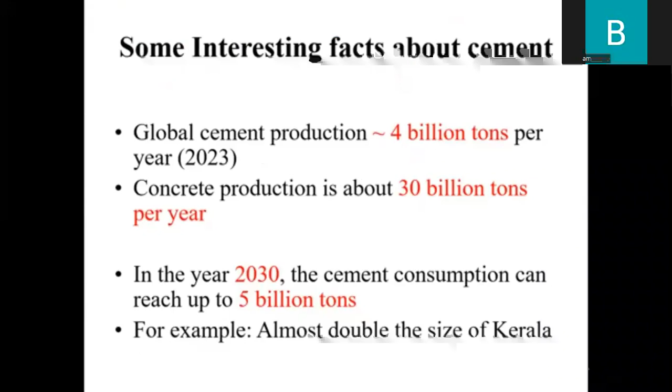So before we move to the session, I would like to discuss some interesting facts about cement and concrete. It is estimated that in the year 2023, 4 billion tons of cement was produced. And another important thing is 30 billion tons of concrete was produced out of 4 billion tons of cement.

And in the year 2030, the global cement production may reach up to 5 billion tons. This quantity is more than enough to cover the entire Kerala state with 1 inch thick cement. So that much amount of cement is being produced and is being utilized throughout the world.

And coming to the next, why is concrete the most commonly used building material and why not others? Actually, based on my perspective as well as from the recent studies led by Professor Gettu and Professor Manu Santhanam from IIT Madras, there are 5 aspects: versatile, durable, constructible, available as well as economical. These are the 5 major aspects in which cement concrete plays a major role.

Versatile in the sense, the adaptability. Concrete is also called liquid stone, which acts as a liquid or plastic mixture when it is wet. In the liquid state, it can be poured and molded into any shapes or any sizes or any forms. And once it sets, it acts as a stone. That is why it is called liquid stone. This allows for the freedom of construction and reduces the structural complexity.

Its properties can be altered by adjusting the mix. For example, if we alter the water cement ratio, aggregate proportion, and the proportions of admixtures, say for example, plasticizer or retarder or air entraining admixtures, the physical, mechanical as well as the durability properties of the concrete will be varied. That is one of the greatest advantages of using this. And as I said previously, it can be molded into different shapes. Its application is widespread in all the civil applications.

And the second important aspect is durable. Concrete shows good durability characteristics under aggressive conditions such as marine environments, whereas steel and other materials will not do the same because of the possibility of corrosion and other related issues in the marine environment. Also, concrete has some disadvantages in offshore application, but when compared to all other construction materials, the longevity of concrete under such conditions is quite high. And if properly designed, concrete structures may last for centuries.

Say for example, we are now in the 2nd generation concrete, which Joseph Aspdin formulated in the year 1824, 200 years ago in England. The same concrete is still used now, but in some countries, people are replacing some proportion of cement with supplementary cementitious materials. It's called sustainable concrete. And this type of concrete we call 3rd generation concrete. We are slowly moving from 2nd generation to 3rd generation concrete.

And the last aspect is economical. Once the building is constructed with the help of concrete, it can stand for years, where low maintenance is required when compared to all other construction materials. So if you provide very low maintenance, it can last for centuries. If you take any steel or bamboo based structures, they may tend to fail or degrade under different environmental conditions. This type of failure or degradation cannot be seen in concrete based structures.

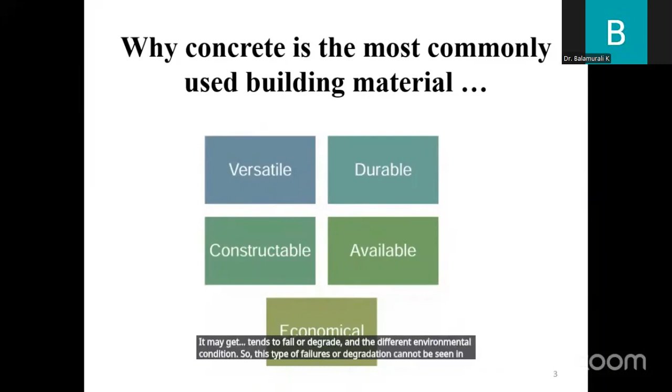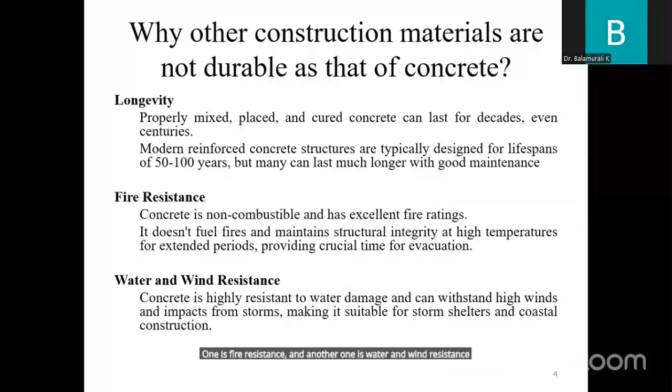Apart from these 5 reasons, we have a few more things. One is fire resistance and another one is water and wind resistance, whereas steel and other materials will not behave as concrete does.

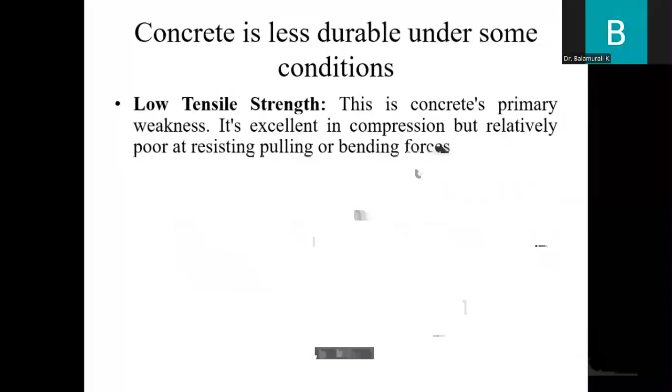And coming to next, concrete might be less durable under some conditions. Generally, concrete is a brittle material. It will not take any tensile loads. Because of it, we use steel as a reinforcing element to take care of the tensile loads. But in addition to that, some drawbacks are there in concrete also. Say for example, cracking. Different types of cracks will be there. Say for example, shrinkage cracks.

During the setting time, it may happen, and loading cracks due to the application of heavy loads, and durability cracks. It may appear due to different environmental factors. Apart from this, there are many cracks also seen, for example, thermal cracks, expansion and contraction cracks. This is due to different weathering conditions. This type of cracks will happen.

And the next is freeze and thaw cycles. Countries in cold weather regions have alternate wetting and drying, because of which the water tends to enter through the concrete pores and tends to expand during the cold periods, which creates a pressure inside the concrete matrix, that is, in the gel matrix. As a result of it, cracking will take place, and slowly it tends to affect the ITZ, that is, the interfacial transition zone, finally leading to failure of the concrete.

And last is ductility. As we all know, concrete is brittle. It can't withstand seismic forces as well as heavy wind forces. So to accommodate that, we have to provide a reinforcing material such as steel or some other low cost materials.

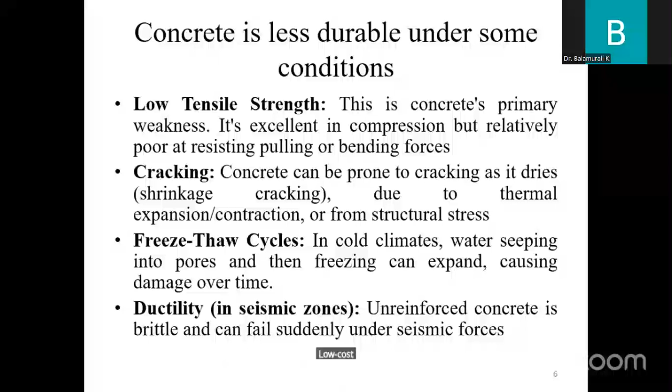And before starting the life cycle assessment of concrete, I'll place two questions in front of you. How should we evaluate the sustainability aspects of concrete? And second, how can we mitigate the environmental impacts? If you find the answers to these questions at the end of this session, then you have completed the initial level of sustainability expert tests.

Introduction to life cycle assessment. Generally, life cycle assessment is a methodology or an algorithm or a step-by-step procedure to evaluate the environmental impacts of concrete, how it is affecting the society. In general, concrete is just like human beings, where a baby is formed and requires 10 months to face the challenges in the outside world. Similarly, concrete requires 28 days of curing after casting to attain its strength for its intended use.

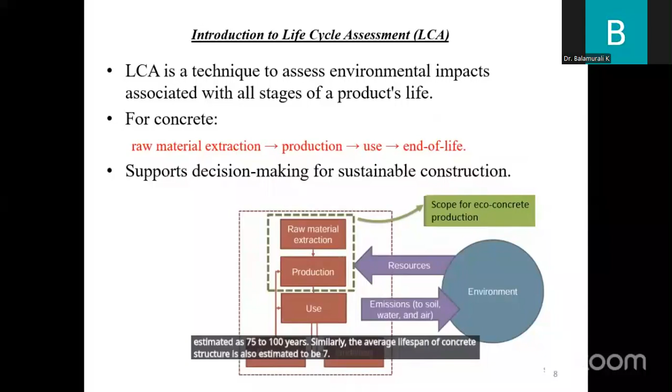The life of a human being is estimated as 75 to 100 years. Similarly, the average lifespan of a concrete structure is also estimated to be 75 to 100 years. In simple words, LCA is the history of concrete from birth to death.

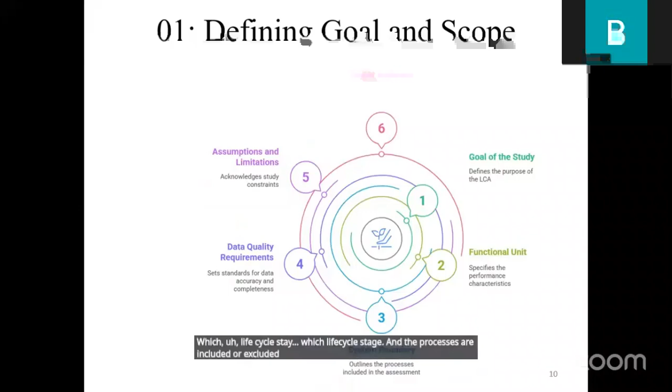Third one is system boundaries, which life cycle stages and processes are included or excluded. You have to decide which stage has to be included. For example, in the case of human beings, whether you want information during the childhood days, the teenage stage, or the senior citizen stage. Similarly, concrete also has to be divided into the stage in which you have to assess the parameters.

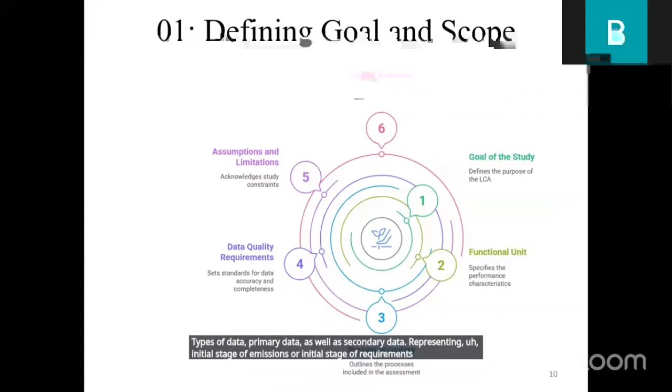Next is data requirement and quality. It specifies the types of data, primary data as well as secondary data, representing the initial stage of emissions or initial stage of requirements, or a final stage of energy data, or the carbon data. And that too we can represent on a geographical basis, or a specific location basis.

Then finally, the limitation. Each and every study has its own limitation. We are human beings; generally, we make mistakes. Similarly, during casting or the production of concrete, we often make mistakes. So that mistake has to be considered as the limitation of the life cycle assessment of the concrete.

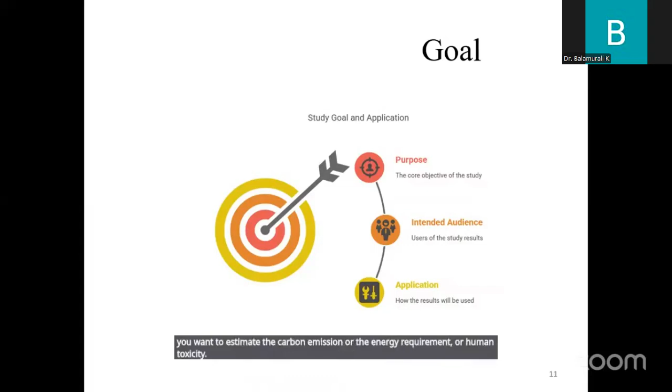First one, goal. Goal answers three questions: purpose, audience, as well as the applications. What is the LCA study trying to achieve? For example, whether you want to estimate the carbon emission or the energy requirement or human toxicity or environmental toxicity and so on. And the second question is, who will use the results?

Whether these results will be utilized by the manufacturers, I mean the concrete manufacturers or RMC plants, engineers, then policymakers such as the Bureau of Indian Standards or American Concrete Institute, and finally the research community. Then how will the results be used? Either for marketing purposes, stating that the concrete is sustainable and long lasting, or for internal decision making inside the production units, for getting green building certification, and for academic research.